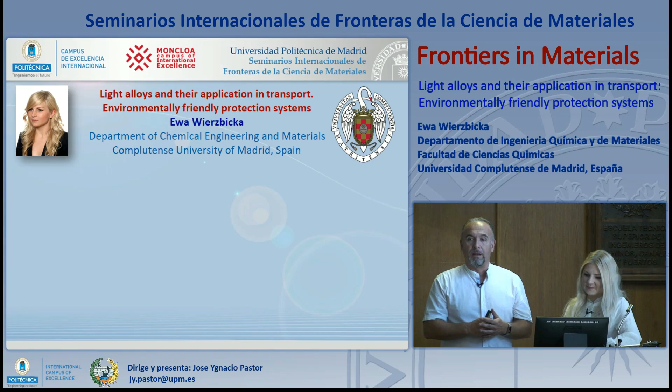Can you help me with the name of the university? University. Well, you can understand her better than me.

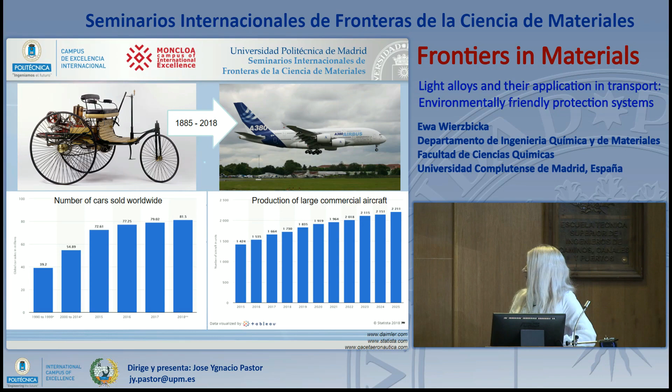More than 100 years ago, the first gasoline automobile was invented. At that time, no one could predict how this invention would improve our life. This year, more than 80 million cars will be sold and more than 1,700 large commercial aircraft will be produced. Nowadays, we also must face the consequences of this invention.

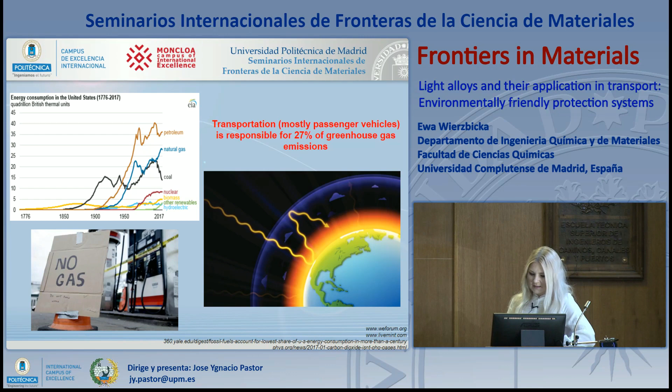The first problem is that the demand for fossil fuels is still increasing, but their sources are being depleted extremely fast. Moreover, car exhaust emits a wide range of gases and solid matter, causing global warming and harming the environment and human health. So what can we do about this?

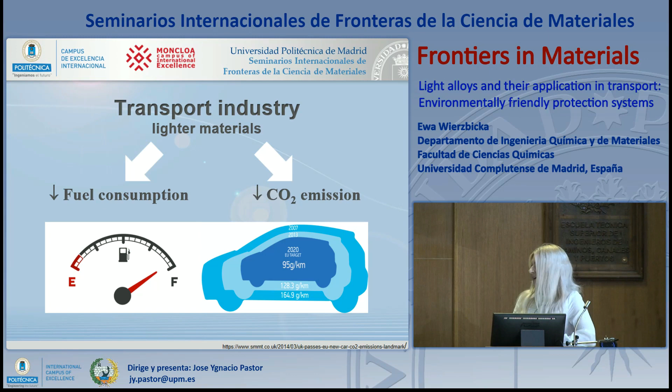Before solar energy and hydrogen fuel will be able to replace classic oil or gas, we can do something more simple: reduce the mass of vehicles by application of lighter materials, which will allow us to decrease the consumption of fossil fuels and also reduce the emission of carbon dioxide.

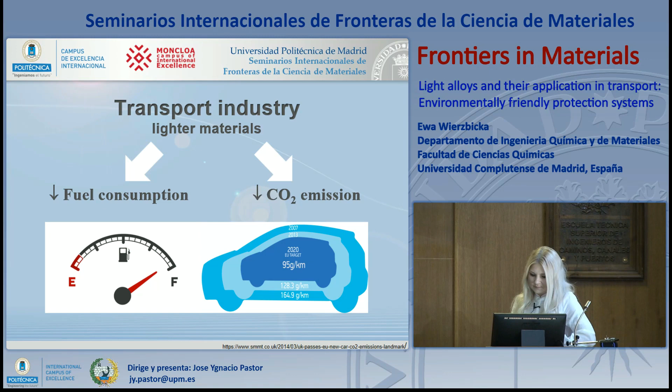Application of light alloys based on magnesium and aluminium is very promising because they have much lower density compared to steel. With the same volume of material, we can save 75 or 65% of mass by application of magnesium and aluminium respectively.

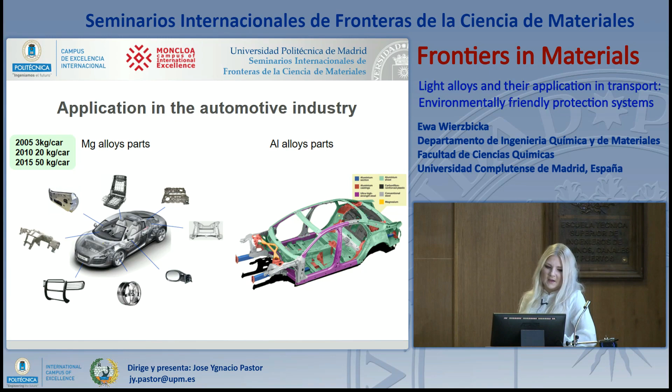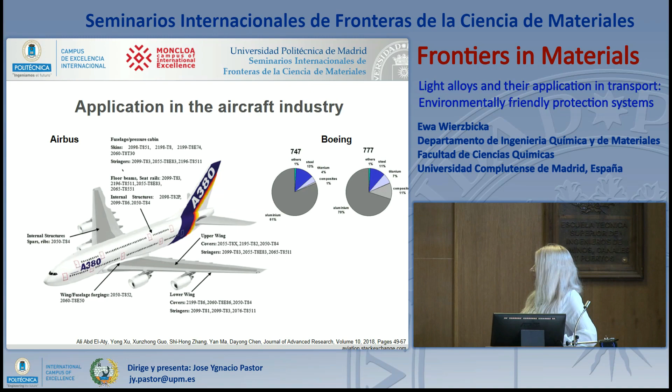Both magnesium and aluminium alloys are already used in the automotive industry. Every year, the amount of those alloys used is increasing. Currently, it is even more than 50 kilos of magnesium per car. Aluminium alloys are also used widely in the aircraft industry. Those are the parts composed of various aluminium alloys. Some Boeing models are composed of even 80 or 70% aluminium.

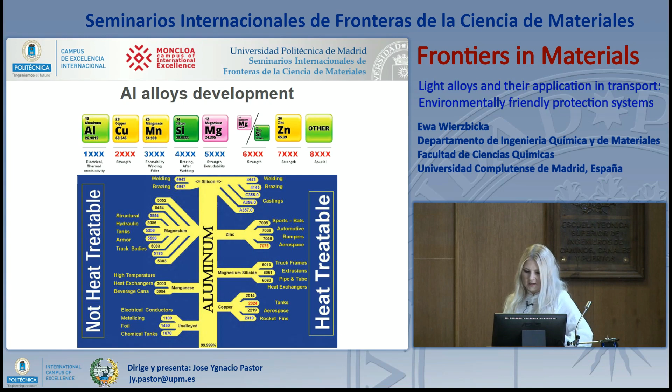But pure aluminium and magnesium don't show appropriate physico-chemical properties to be applied for big parts production, and because of that, huge progress in metallurgy was necessary. Currently, there are a lot of options to modify the pure metal by some alloying elements and change their properties. Very popular in aircraft is the aluminium-copper alloy, which increases the strength of the material.

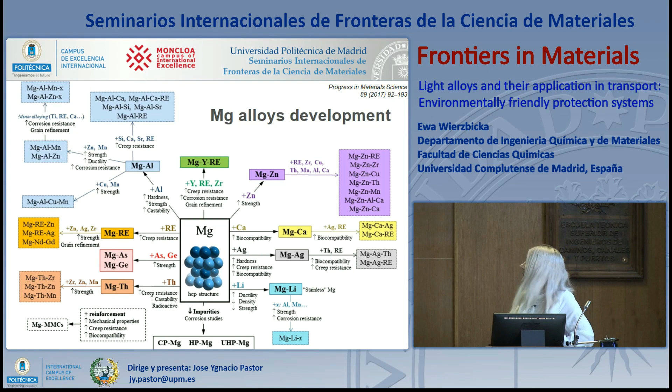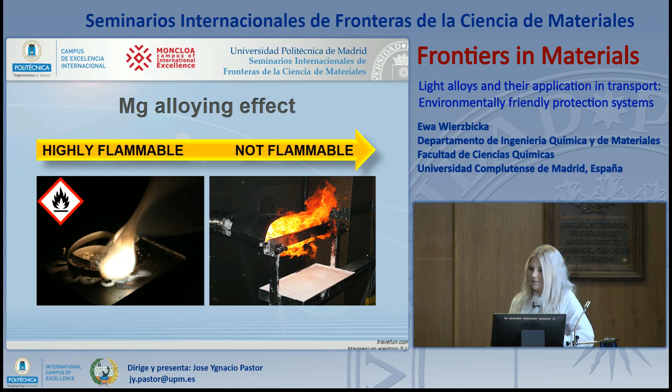There is also a whole spectrum of modification possibilities in the case of magnesium alloys. The biggest one is the elimination of its high flammability, which was a milestone for any application of this material.

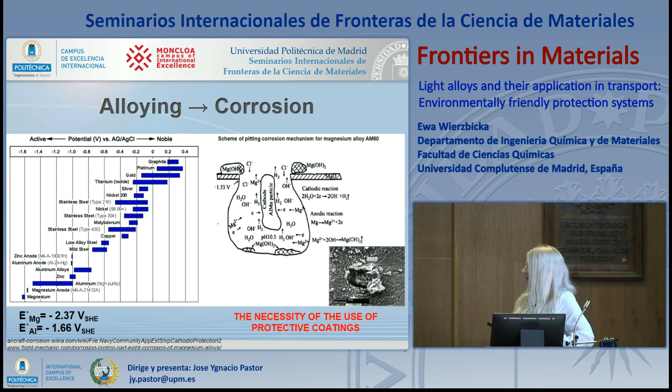Because magnesium and aluminium are among the most active elements, they are very sensitive to corrosion. In the presence of alloying elements, this effect can be even accelerated because of the formation of galvanic couples, where our metal forms the anodic side, is oxidized, and very quickly dissolves. Because of that, there is a big need to provide efficient corrosion protection for those metals.

The most popular and very effective type of anti-corrosion coatings were based on chromium-6. They were corrosion protection leaders since the early 1920s, so in general from the moment of their invention. However, chromium-6 is a very toxic and carcinogenic compound. Through the respiratory tract, it can easily go into the human body and damage the internal organs.

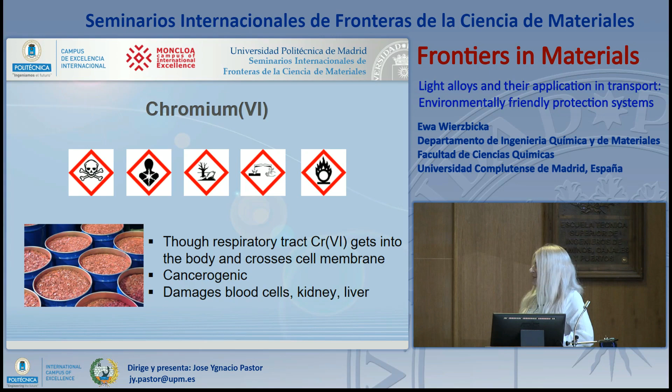Because of that, 18 years ago, the European Commission decided to gradually limit the application of chromium-6 by establishing appropriate directives, and finally, in September 2017, the application of chromium-6 was completely forbidden. But replacing an older technology, which is well characterized, is not so easy, and because of that, for some crucial and critical applications like aerospace, the application of chromium-6 is prolonged until 2024.

Our ALMAGIC project, conducted in cooperation with our university, other scientific units like TU Delft from the Netherlands, Helmholtz-Zentrum Geesthacht, CIDAUT Foundation, and companies like AkzoNobel, MTU, and Henkel, is focused on development of alternatives to chromium-6 coatings for aluminium and magnesium alloys. And it is dedicated exactly to advanced aerospace applications.

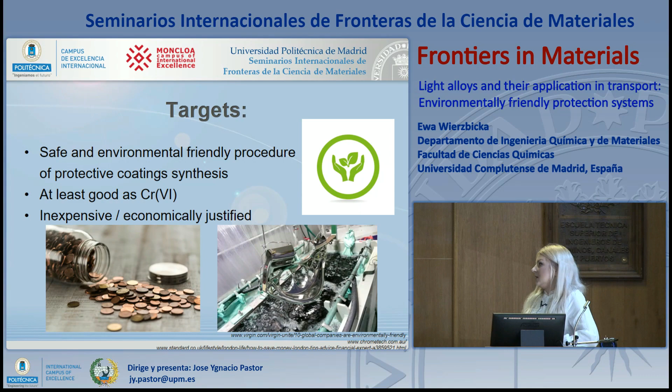In the project, we are working on two types of coatings: chemical conversion coatings, which are formed by chemical reaction, and anodic coatings, which are formed by electrochemical reaction. The former are, of course, cheaper in production, and the latter require additional energy input, but show better performance.

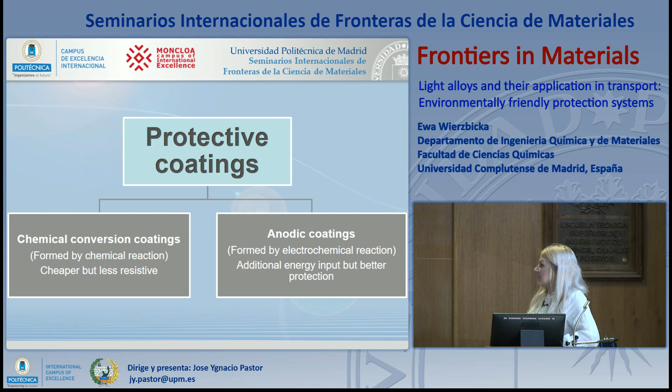This is the general mechanism of chemical conversion coating formation. A part of the substrate is transformed into insoluble phases at an appropriate pH, and it forms something which is more corrosion resistant and insoluble. The compounds that show good corrosion performance can be in cation, anion, and organic species form.

Currently in use are also chromium-3 and vanadates, which will soon be forbidden as well because they are also toxic. Chromium-3 in detail is not toxic by itself, but during processing it might turn into chromium-6 compounds.

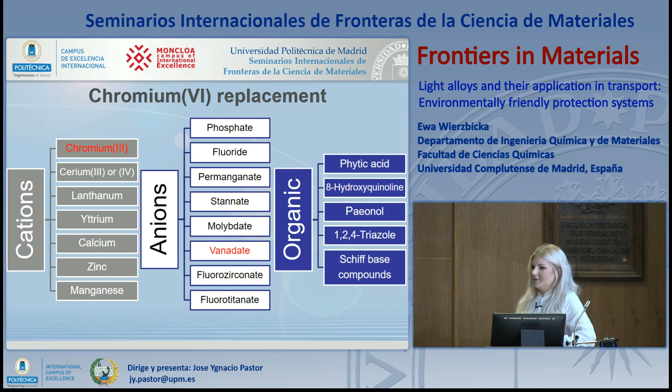Now, the big target in the development of coatings is the introduction of active corrosion inhibitor species into the coating. In addition to the base composition of the coating, we can introduce the inhibitors. The base coating is responsible for forming the protective layer from the environment, while the inhibitors are able to target specific regions on the metal surface, interact with the metal surface in corrosive media, and precipitate in the form of an insoluble compound in the place of coating damage.

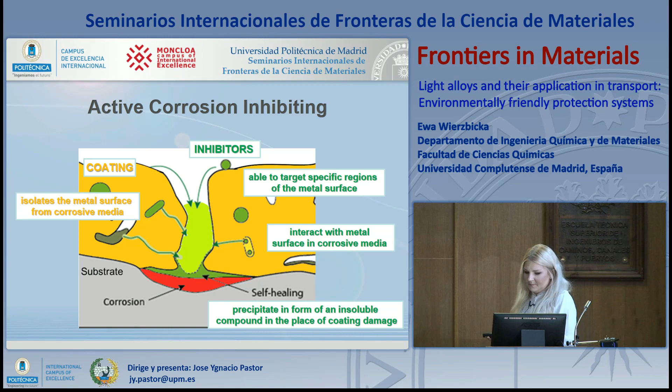Very novel is the application of layered double hydroxide as a conversion coating. It is composed of a layer of 2+ and 3+ hydroxide and a layer of anion mixture with water. This structure is so interesting because it can be loaded with corrosion inhibitors, and then in the presence of corrosive media, there is an exchange reaction in which the LDH binds the chloride anion, and the inhibitor is released and can be precipitated in the place of coating damage.

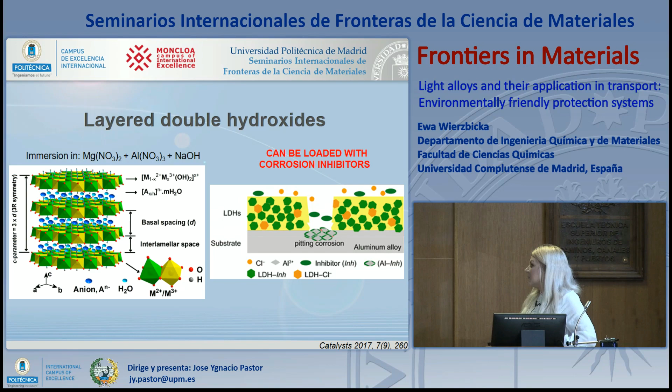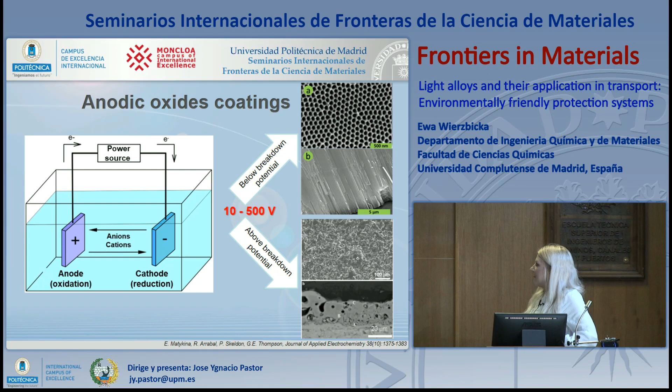The second big group of protective coatings are anodic oxides. They can be formed by a simple anodic reaction in the electrolyte, by application of an external power source. The applied voltages can be very varied. We can do this procedure under two conditions, below breakdown potential and above breakdown potential, which provides different morphology of those coatings.

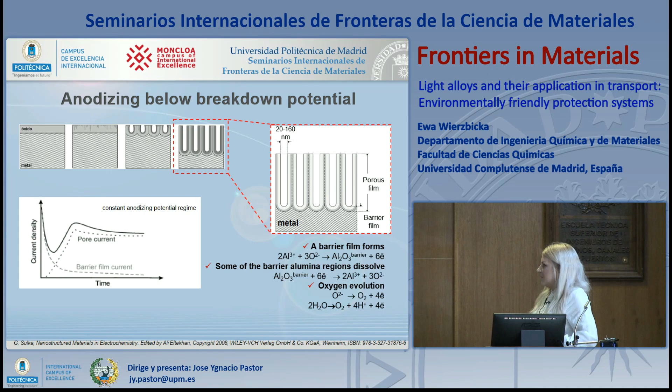Anodizing below breakdown potential is a much better known technique. Firstly, during this process, a thin oxide layer is formed, which corresponds to the current drop. Then, in the place of some imperfection of this layer, the pore starts to form, which corresponds to the slight increase of the current, and then the steady state formation of these long pores occurs, which corresponds to this part of the current-time curve. In this way, we obtain a very long porous structure with a thin barrier layer very well attached to the metal surface.

The second type of anodic coatings are coatings obtained by the plasma electrolytic oxidation process, which is a process that requires very high applied voltages. The process goes through the same stages in the beginning as classic conventional anodizing. Firstly, a passive film is formed, then a porous structure, but after exceeding the breakdown voltage, micro discharge and plasma formation starts. This can be observed on the metal surface as the formation of small sparks.

The plasma has very high temperature and pressure, and because of that, it can go through the discharge channel and form the layer on the surface. The coating obtained this way has 3 layers. The top layer is quite porous, but the intermediate layer has a quite dense structure, and there is also a barrier layer without any pores. It is also worth mentioning that these techniques allow a strong incorporation of elements from the electrolyte.

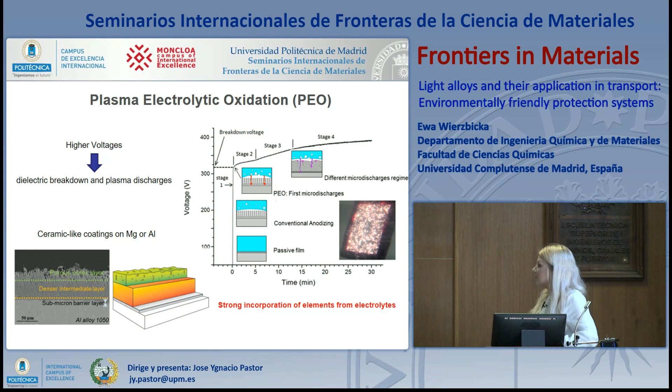Those two techniques, conventional anodizing and PEO, have big differences. First of all, PEO requires much higher powers. Second, PEO uses a dilute neutral or alkaline solution, and conventional anodizing uses an acidic one. A big difference is also that using conventional anodizing, in general, we cannot successfully cover magnesium because of the Pilling-Bedworth ratio. This ratio defines the volume of oxide that is formed from a volume of metal. In the case of magnesium, it is lower than 1, which makes it physically impossible to cover magnesium by magnesium oxide.

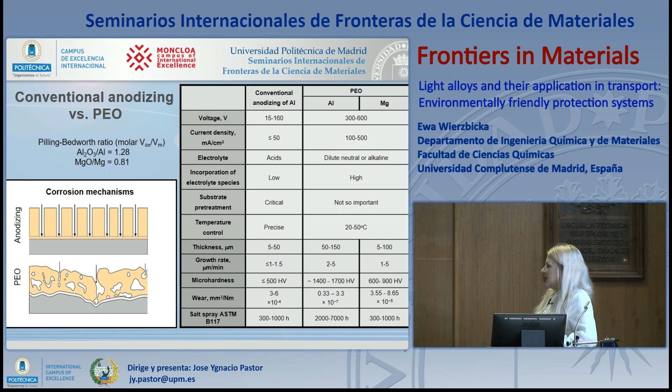There is also a difference in corrosion mechanism. Through the almost through-hole pores in the conventional anodizing structure, the corrosive media can much more easily reach the substrate. It is protected by this barrier layer. In the case of PEO, we have some pores, but they are closed on both sides, so this process goes not so easily. Comparing the final results in a salt spray test, we can see that aluminium protection obtained by classic anodizing can stand 1,000 hours, and in the case of PEO, even 7,000 hours.

Of course, this anodic coating can be improved by many options. First of all, we can change some parameters that affect the basic part of the coatings, and for that we can change the anodic conditions, like current and voltage. We can change the waveform parameters and duration of the process, the basic components of the electrolyte, or do some post-treatment sealing to reduce the porosity of these coatings.

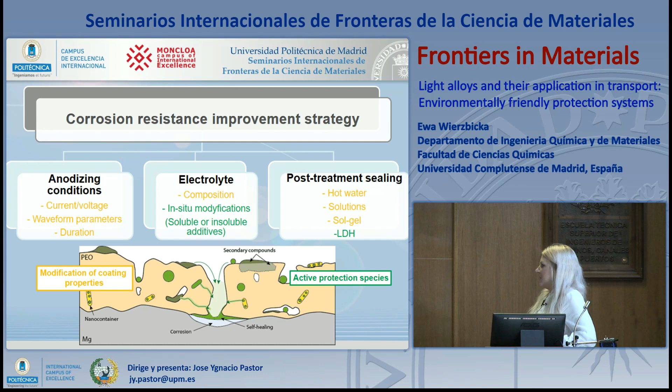On the other hand, we can improve long-term protection of our coatings by application of active protection species. We can use in situ modifications by adding a small amount of corrosion inhibitors into the electrolyte, as well as apply LDH as a post-treatment.

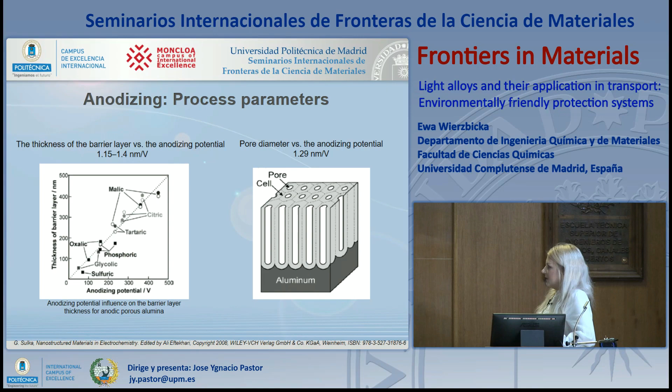The parameters of the process in the case of classic, conventional anodizing relate the thickness of the barrier layer with the potential. So by applying higher voltages, we can obtain a thicker barrier layer, which is positive for anti-corrosion properties. However, at the same time, we will increase the dimension of the pores, which is a bad effect for anti-corrosion properties. So it's good to choose optimal parameters that will be good for both things.

This relation is also used in more advanced procedures, like pulse anodization, which provides a moderated size of the pores, and coatings like that can have better properties, like better hardness.

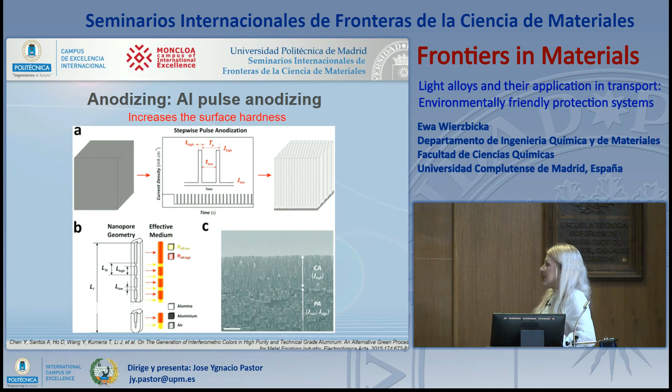We can modify the electrolyte by simple in situ doping, so by adding some small amount of some substances that can be in inorganic form or organic form and provide the corrosion inhibitors to the coating. Also, we can use particles which are very stable phases, like titanium oxide or zirconium oxide. Presence of these species also might affect the morphology of the final coating.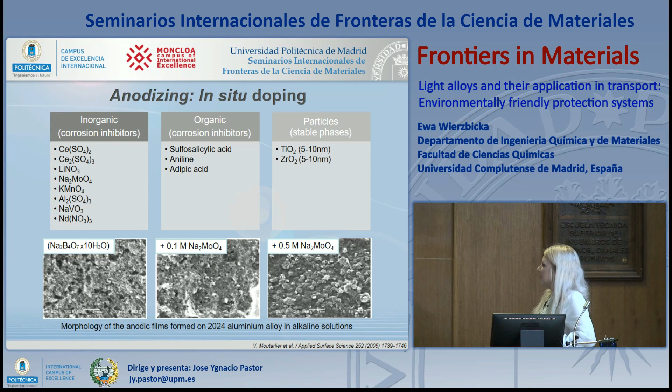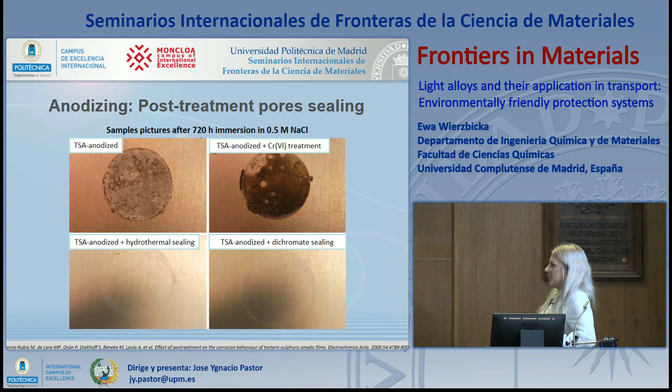The last option is post-treatment pore sealing. As you can see, after very long time exposure to corrosive media, the samples after anodizing and hydrothermal sealing, which is simple hot water treatment, look much better than the only anodized sample or even anodized with some chromium-6 post-treatment.

To summarize, by application of varied acids for anodizing, varied modification of this procedure, like using in situ modification and post-treatments, we can obtain coatings with different protection efficiency. The good news is that by only obtaining slightly thicker coatings like those ones, we can get better corrosion protection than chromic acid anodizing.

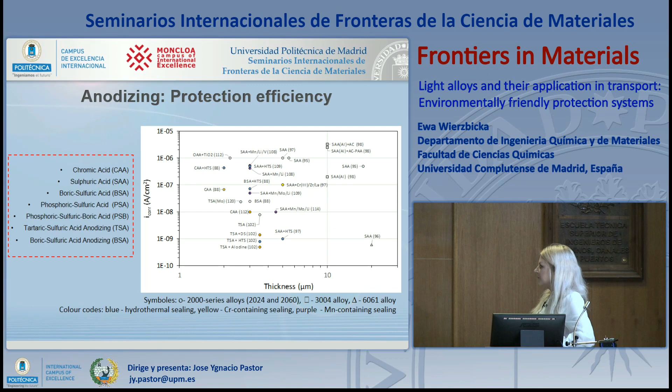PEO coatings: we can use a similar strategy to modify the PEO coatings, like by application of different waveforms. We can get different discharges during the process, which affect the final structure of the coating. Also, we can modify the composition of the electrolyte by using varied species. We can introduce varied phases to the coatings, and it will also affect the morphology of the final coating.

There is also the possibility to add some soluble species into the electrolyte. They can be organic or inorganic as well. By using some organic additives, we will affect mostly the PEO process, and this way we will change, for instance, gas evolution or discharge population density.

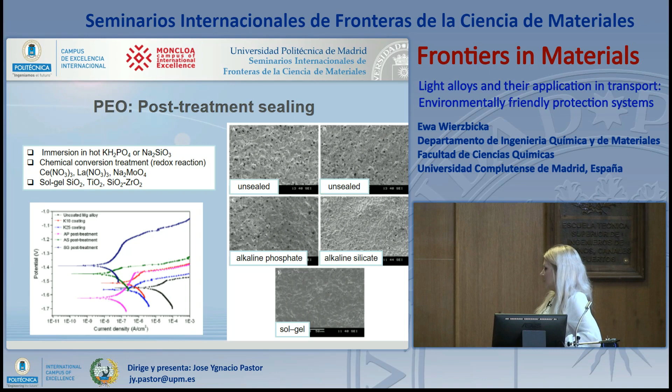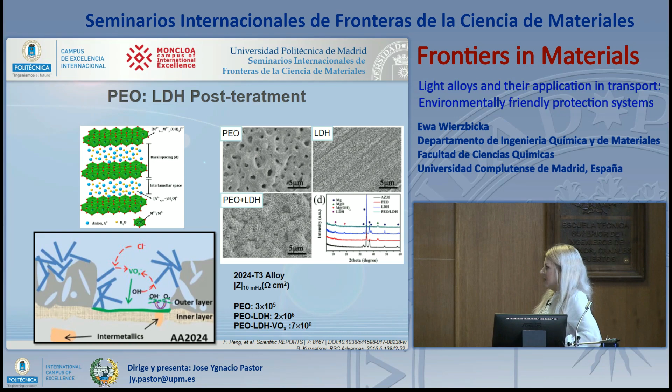So to sum up, light alloys can have very wide application in transport due to their lower density. For this reason, we can reduce fuel consumption and carbon dioxide production, but there is a big need to protect them from corrosion.

And the corrosion protection, since chromium-6 coatings are prohibited, can be in the form of chemical conversion coatings or electrochemical anodizing or PEO. The advantage of chemical conversion coatings is low production cost, and in the case of electrochemical anodizing or PEO coatings, it is higher corrosion protection. So this way, the level of protection can be adapted to the requirements.